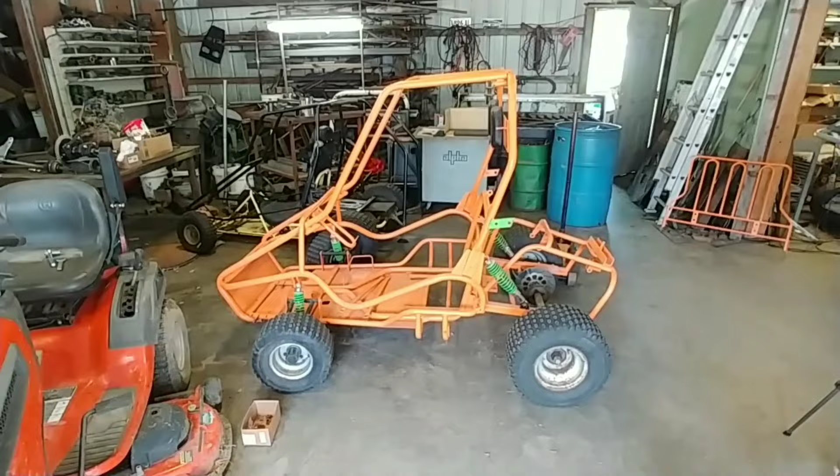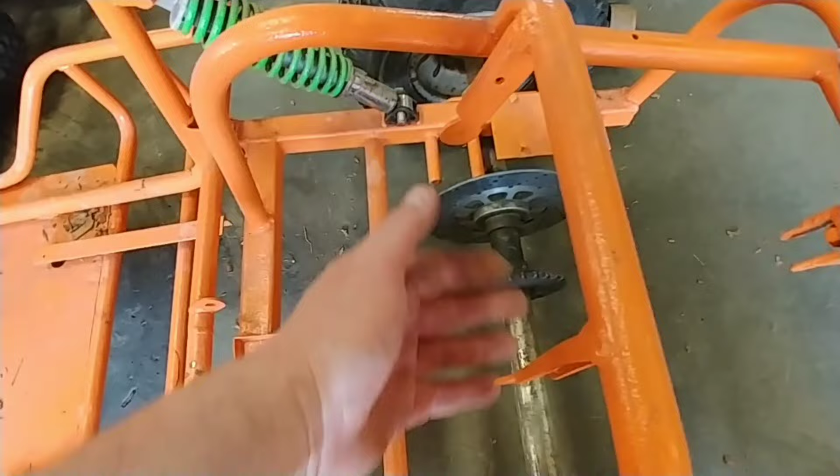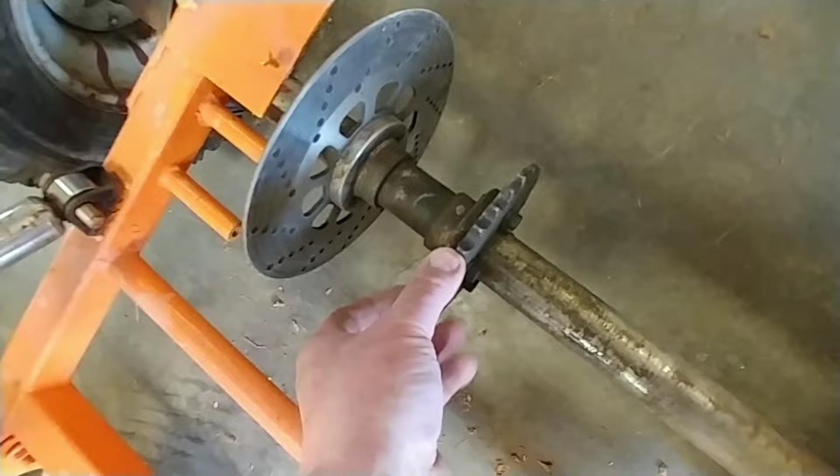So, the way this worked with the original engine, it had like a scooter motor that hung in here. No, not up there. Hung in here and there. I think that's a chain tensioner. And then the sprocket went down to that. That's how that worked. It was like a scooter motor. I think that'll be probably where the battery sat right there. And then the brake caliper looks like it hooked up over there.

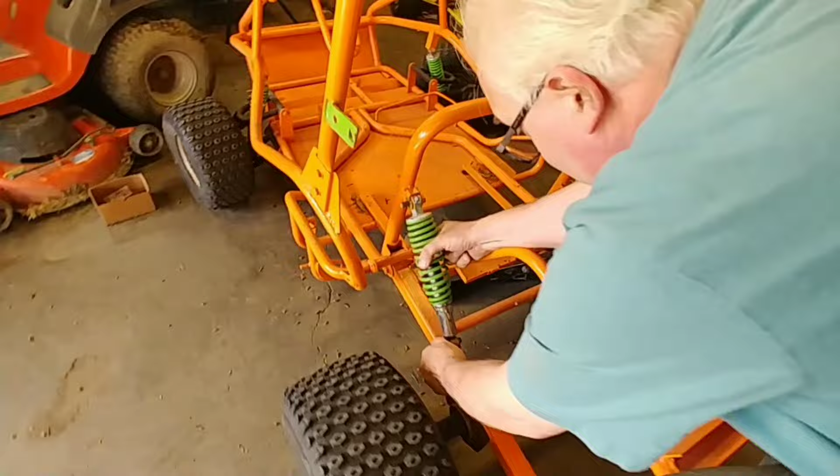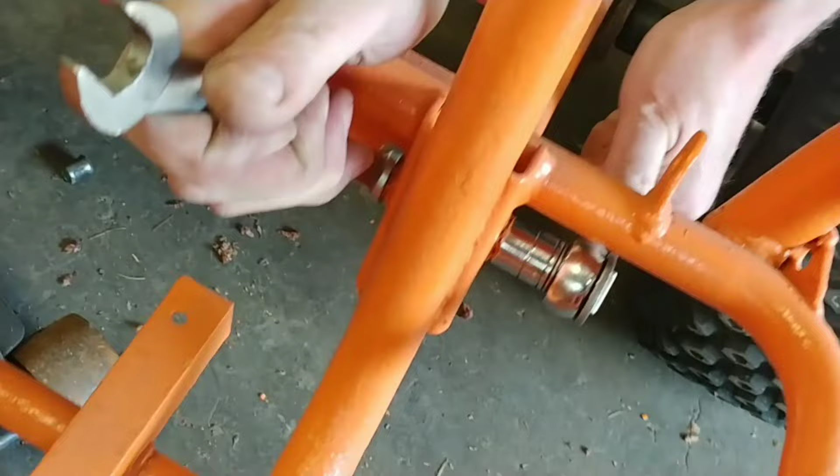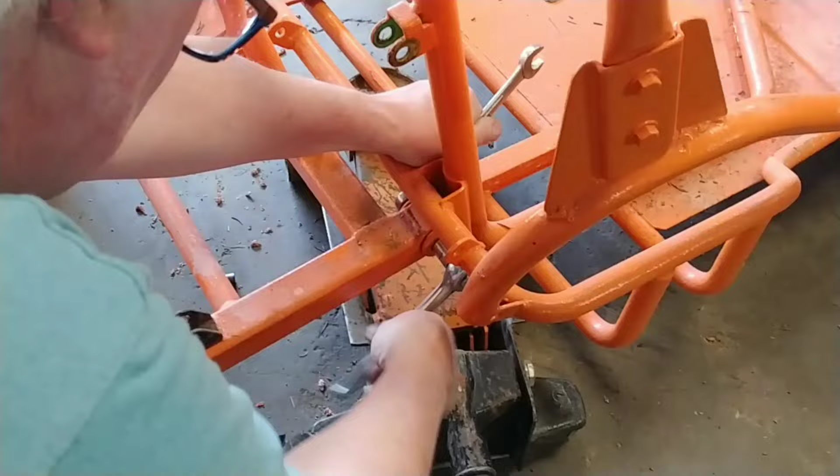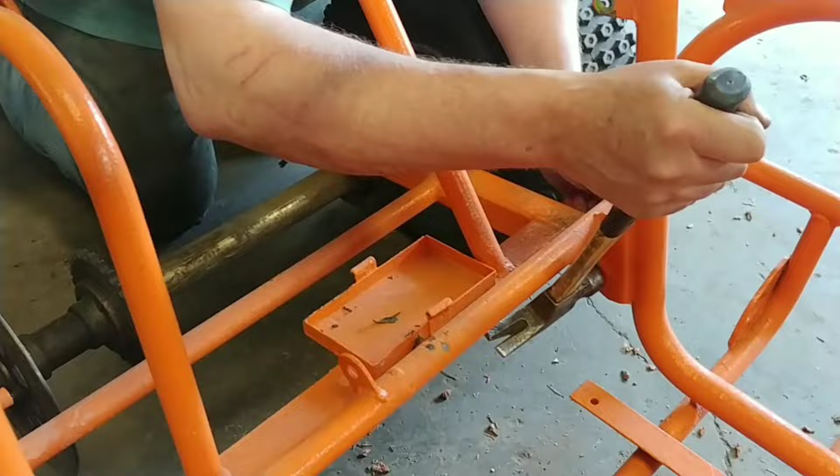So, okay, now we're gonna pop that off. How this works is there's a pivot down here, and so we're gonna pop those two bolts out and get this back carriage set up on. There we go. Unhooked.

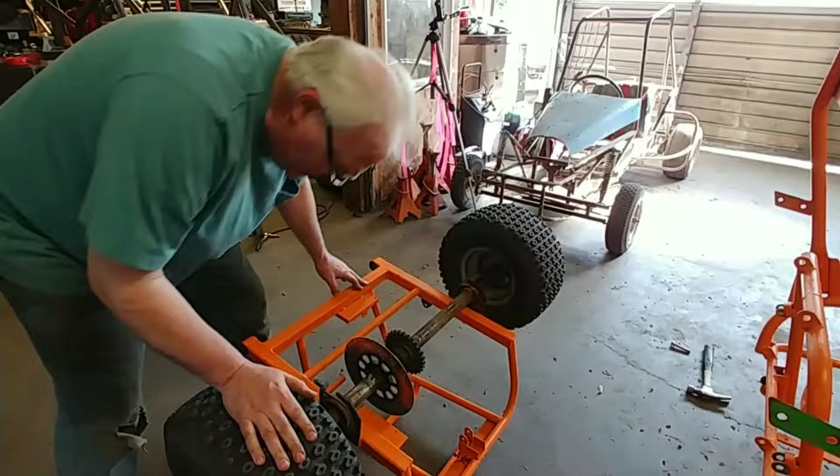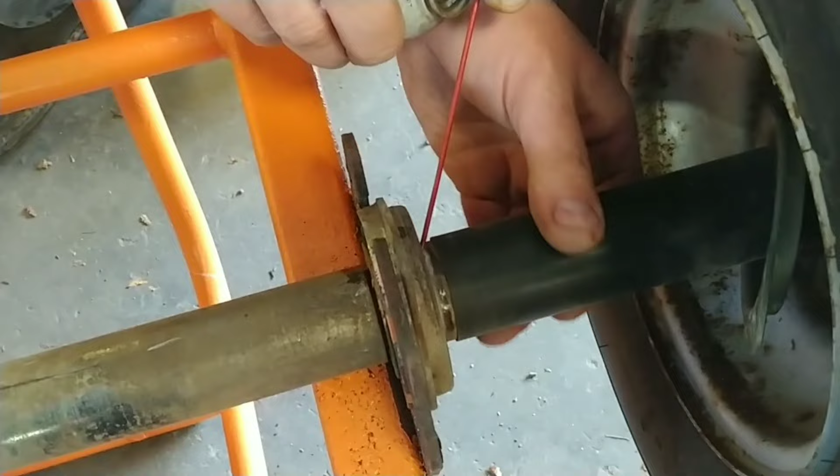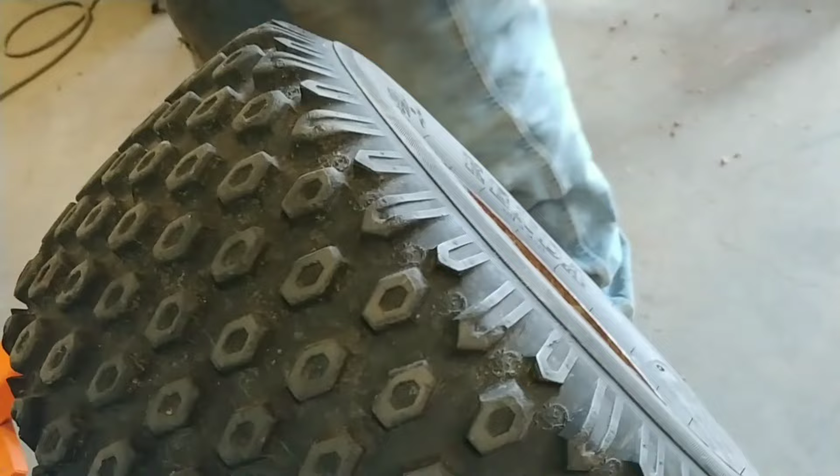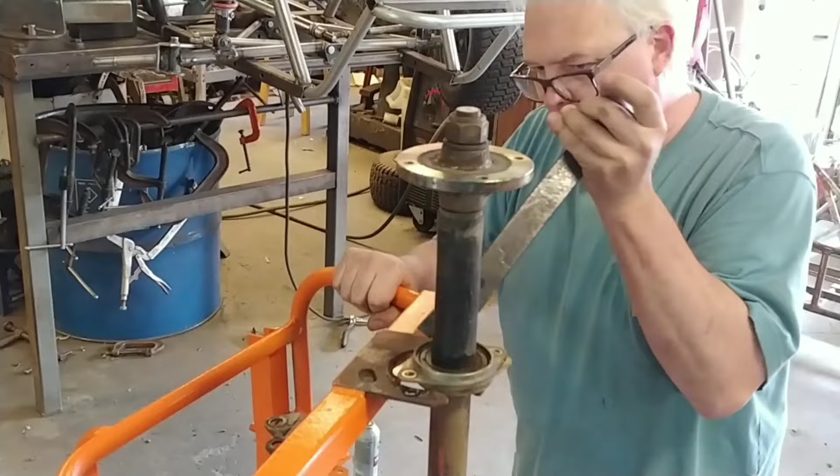Alright. See what holds this together. Looks like we're missing bolts. Almost. I think I'll pull this wheel off. Got two loose nuts. Bend this around it. Here we go. Okay, we got it.

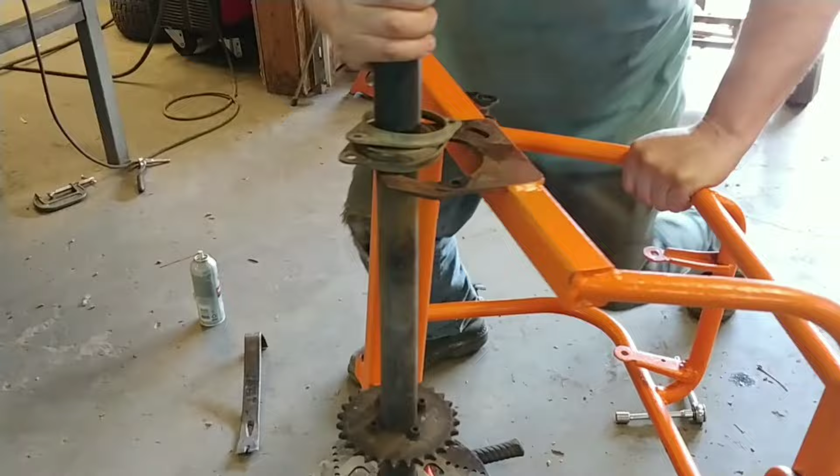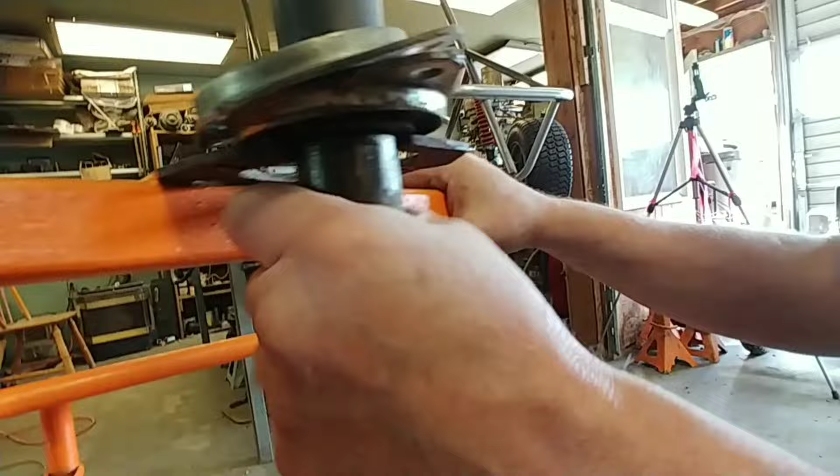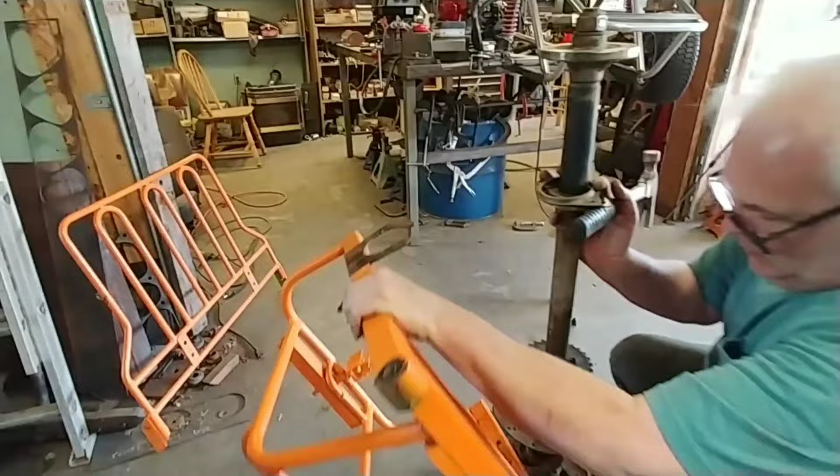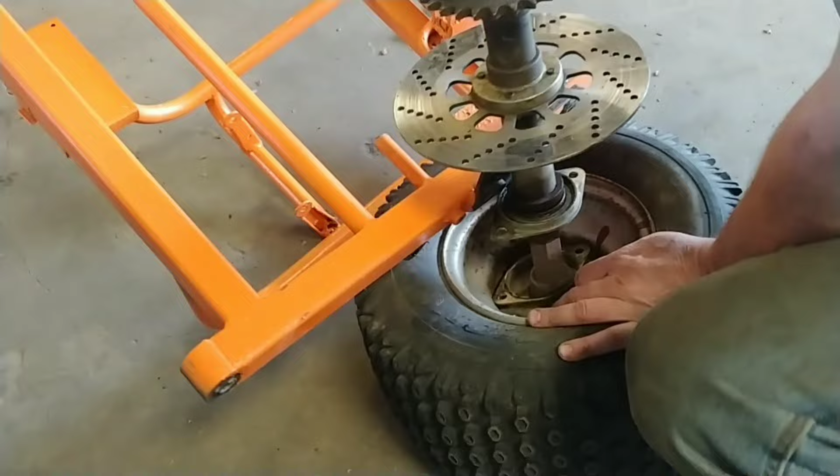Oh, nice. They gave us a slot there, but it's narrower than the spacer. See that? So it's never designed to come apart easy. Okay, I'll beat on it. Yeah, same thing here. See that? The spacer is bigger than the slot. The designers didn't design it to be torn apart. There we go. We got it.

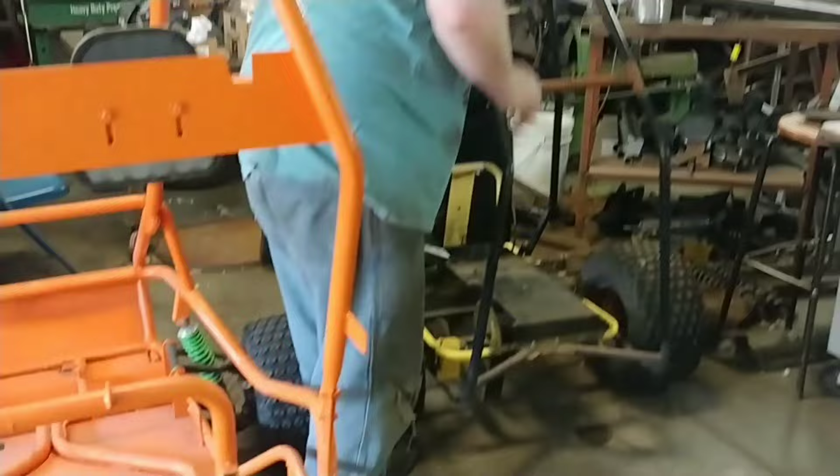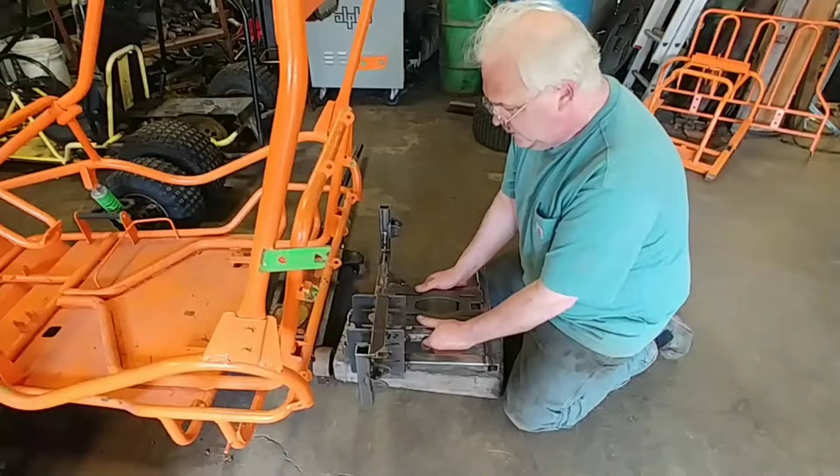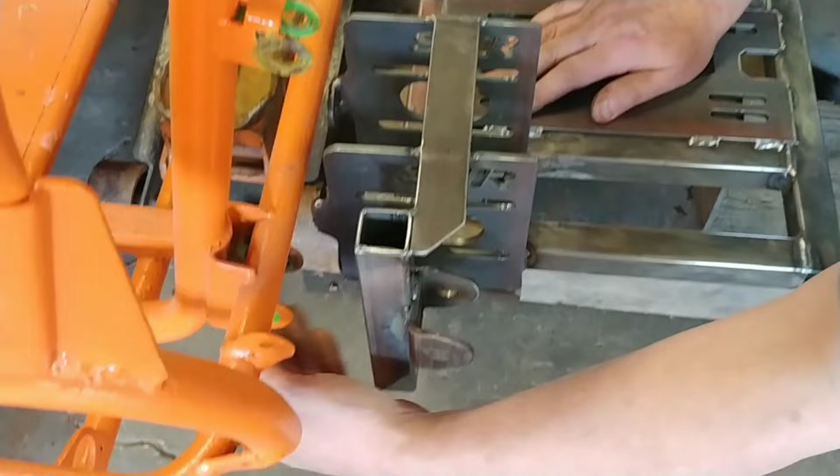Okay, now we're ready to start mocking up the framework and the axle. Look at what's next. So look at this engine carriage here. Okay, this bar here, I want that to be kind of even with that one. That bottom bar there. And then this will attach into here. That'll attach into there. Like that.

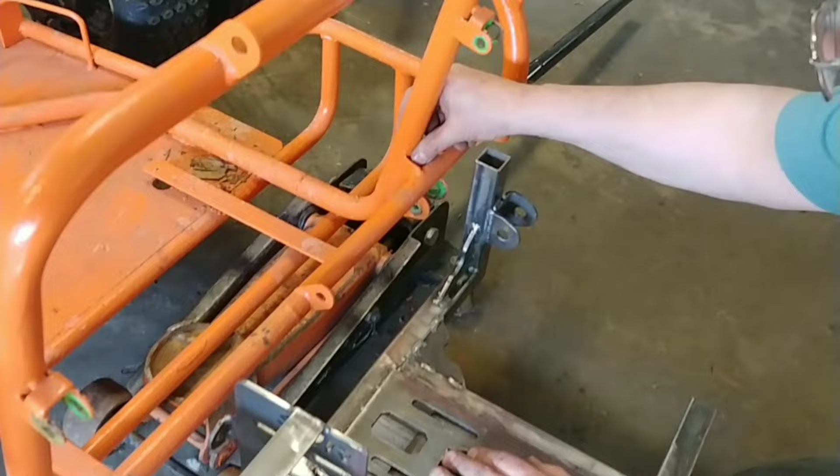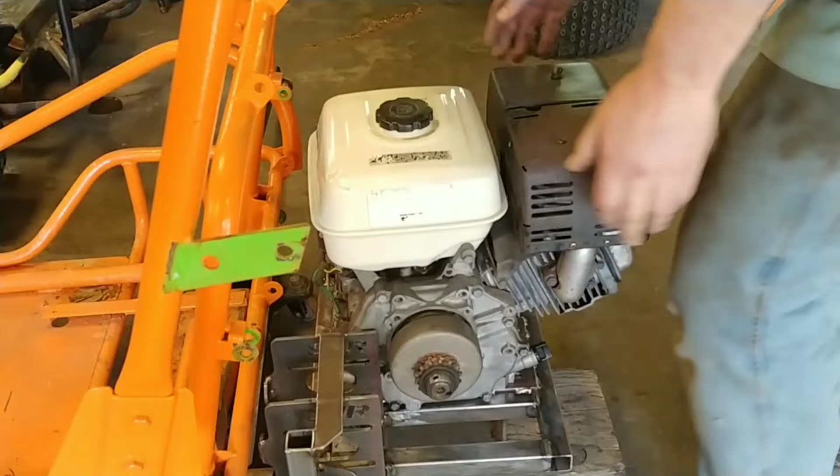Okay. We might take this bar out. Yeah, that bar might just come out of there. It'd be good to get this close. Could even get it closer right up against there. Be fine. Okay, let's put the axle there.

It's a hot one. And there's no breeze. It's hot and there's no breeze.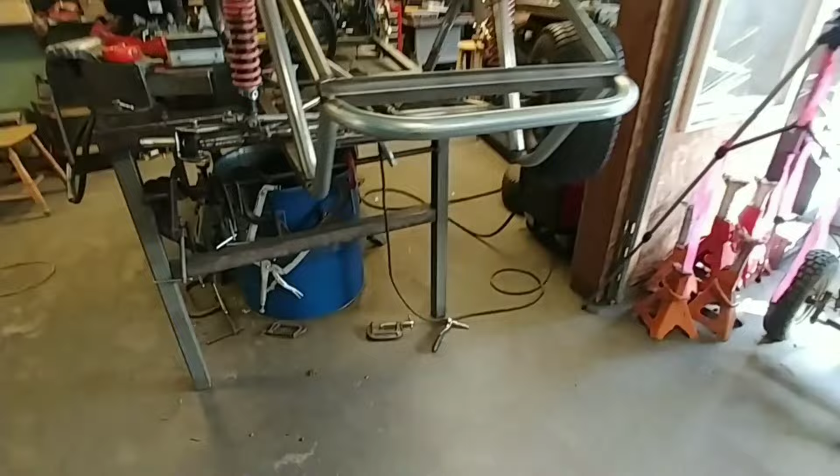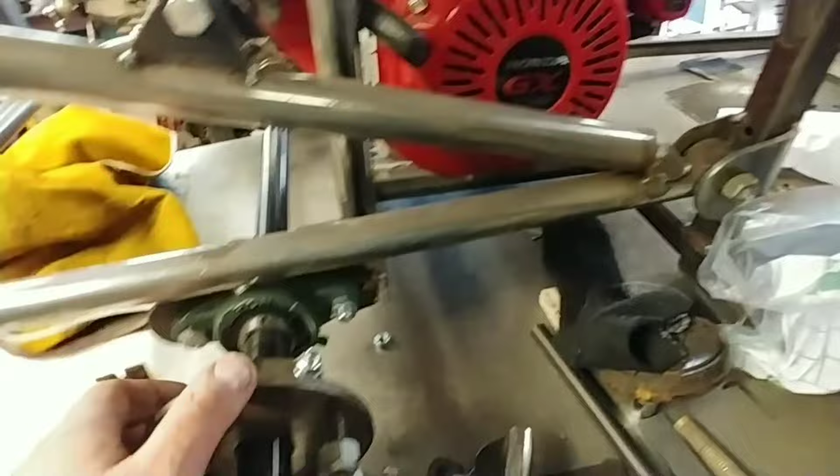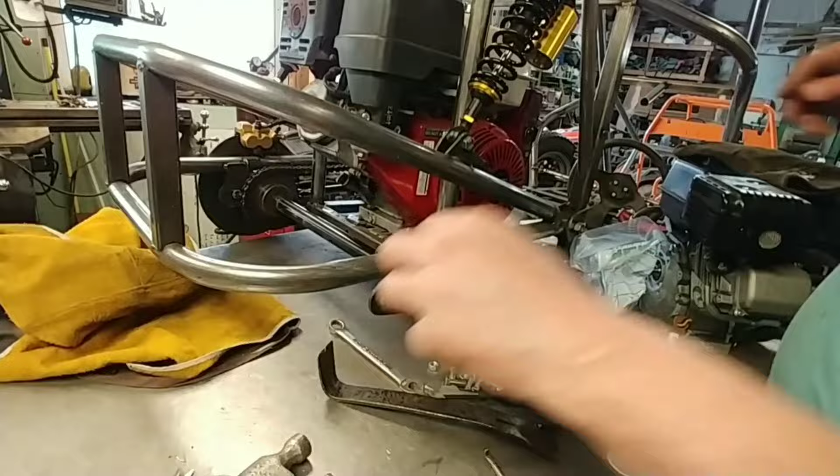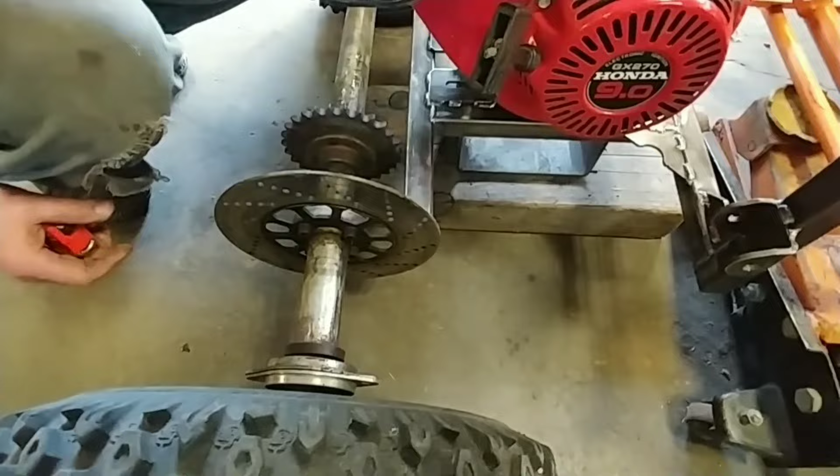So let's go look at what it looks like on the pattern. So what we got is this bar, pivot, axle, then I'll have a swing arm. So let's check this out. Okay, so we got about 15 inches from the pivot to the axle. So let's look what we got over here. So, yeah, we got about 15 right there. So yeah, I like that. I like how it's coming together.

I think what I'm going to do right now, I'm going to go ahead and cut that. Now that we see it, I'm going to cut this bar out, and then we'll slide her forward. This is closer. And this motor is a 9-horse. It's a 270 Honda. So this framework I made will fit the 240, 270, the 340, the 390, also the 200, the 212. So there's 3 different blocks that'll fit in this carriage. So I think what I'll do is get the saw and cut there and there.

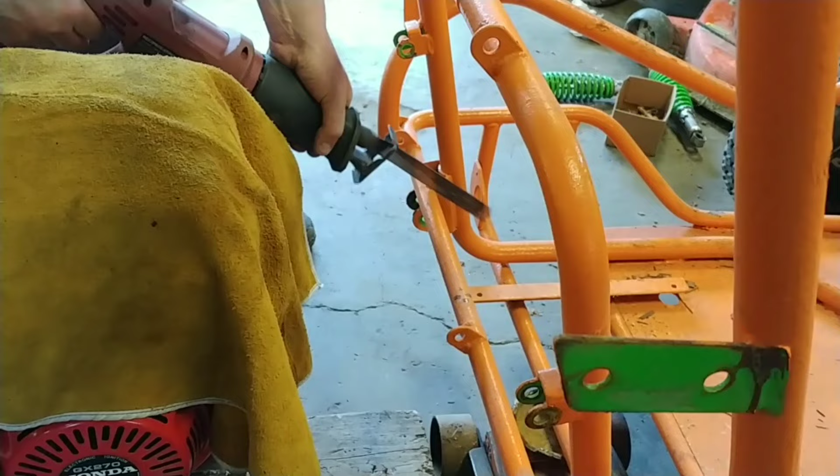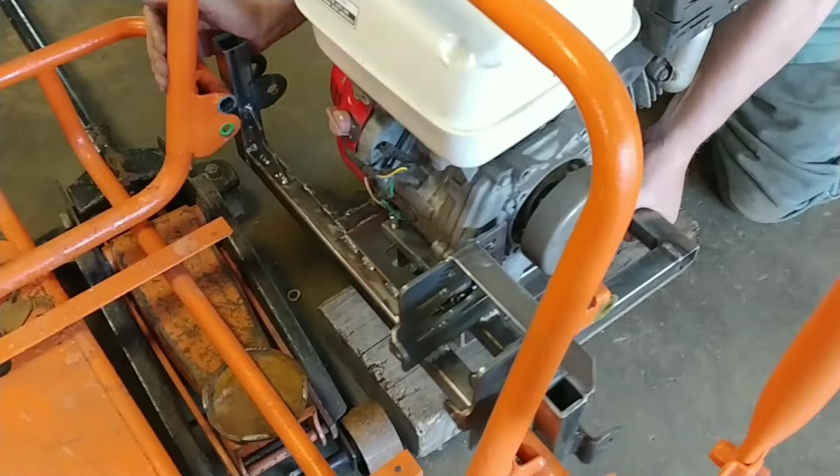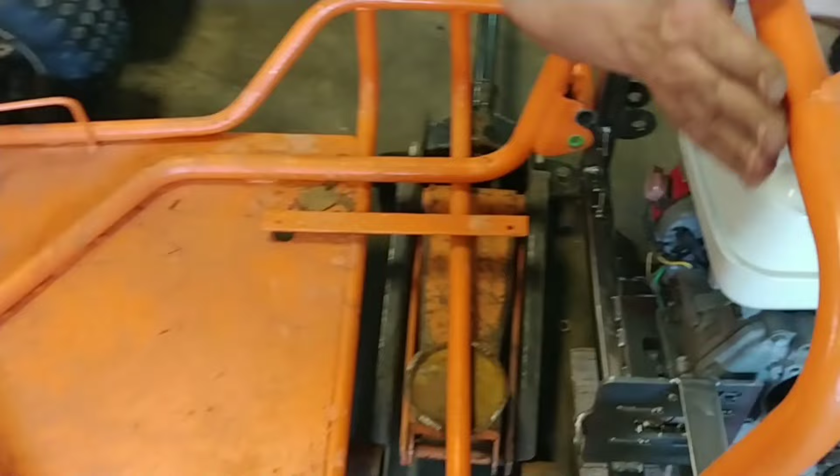Alright, let's get this closer. Alright, I like that. That might be where it lives. Might go down a ways. We got the back of the seat. Back of the seat's right in here. And also I'd like to sneak a battery in here somewhere. So then the adjusters for this. So I think that's good right there.

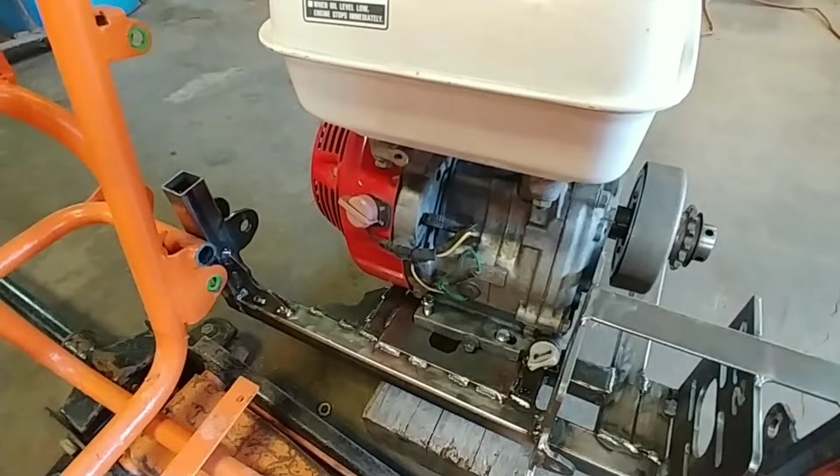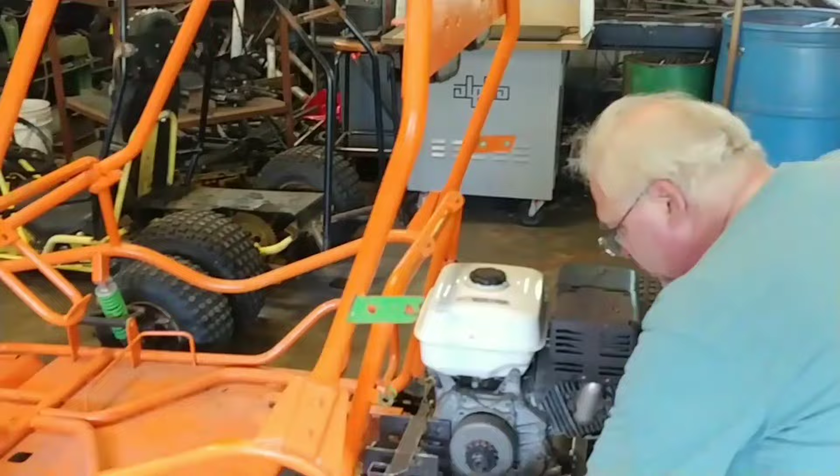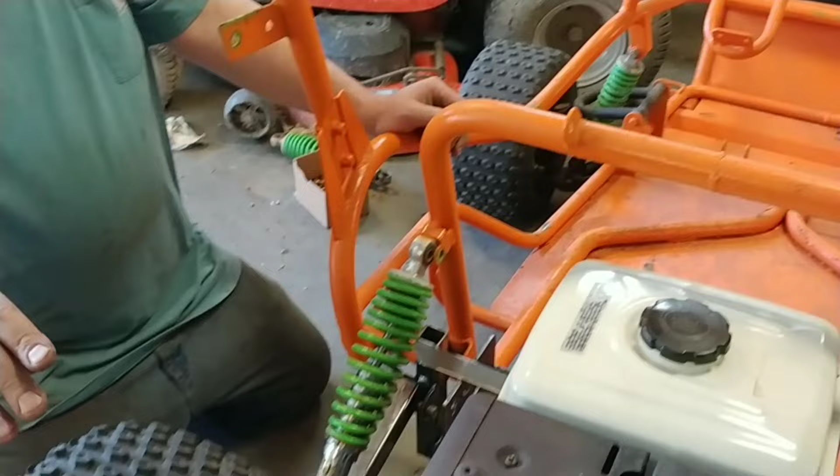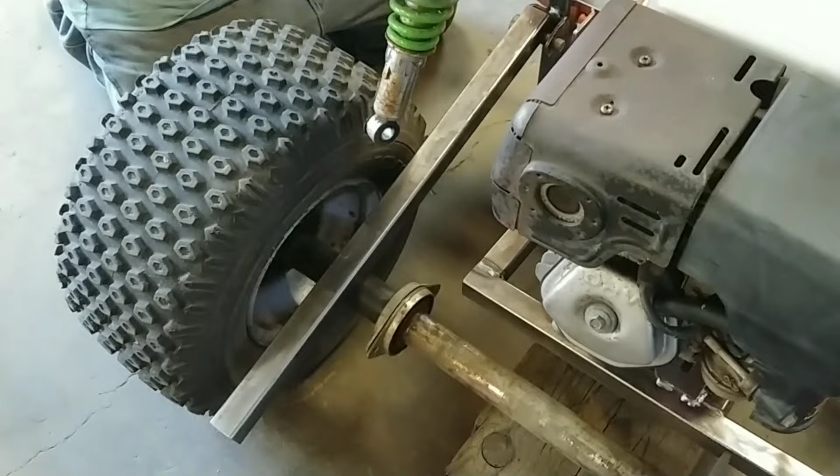So I think on this framework, come off back here with a loop, and then this is the bottom bar, and then there's another top bar that comes like that. We'll put the shock right in there. So this will have a framework like that, and then that'll go like that, just like that.

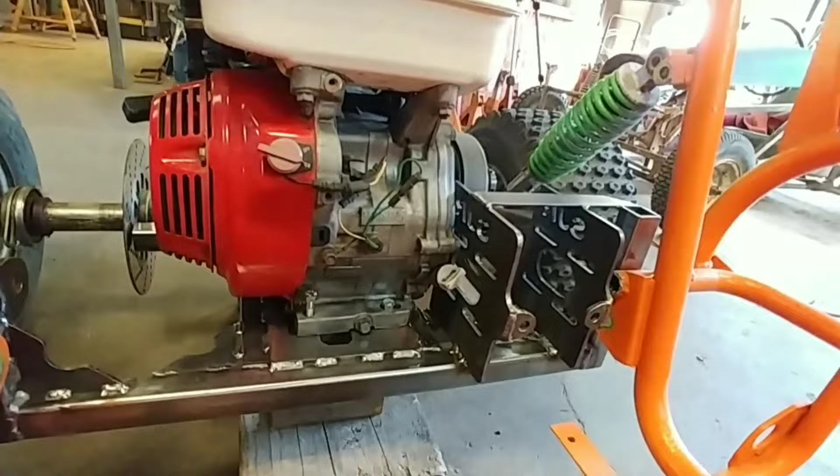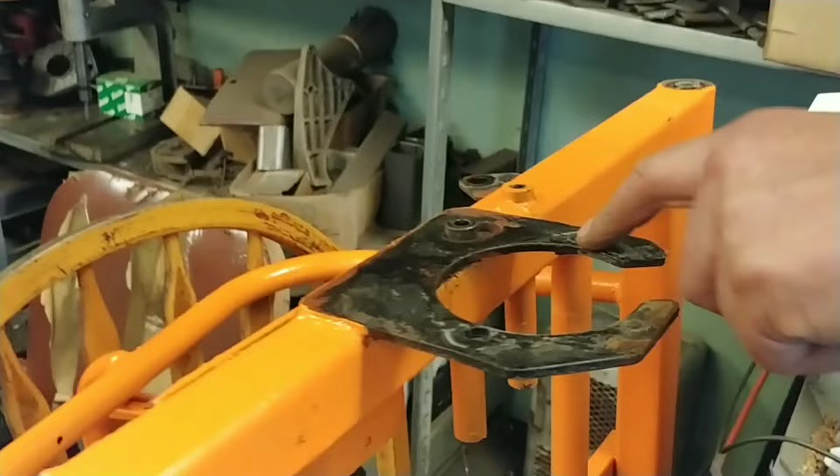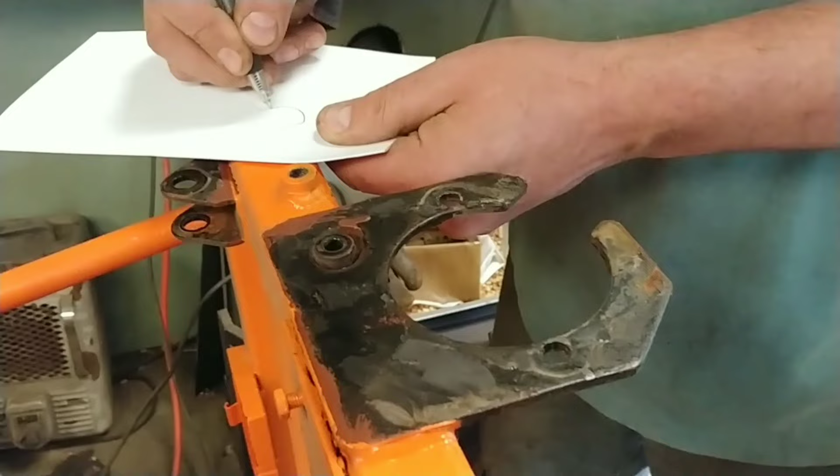Okay, so this is the pattern for the axle bearing. I'll show you how I'm going to do this. Come on in here. So I need to draw this pattern and make sure I got a bigger slot than that, because I'm going to put brackets like this on the swing arm I'm going to make. So first of all, we just draw what we have. There's that. And we have a slot. Okay, now we need to measure all that stuff.

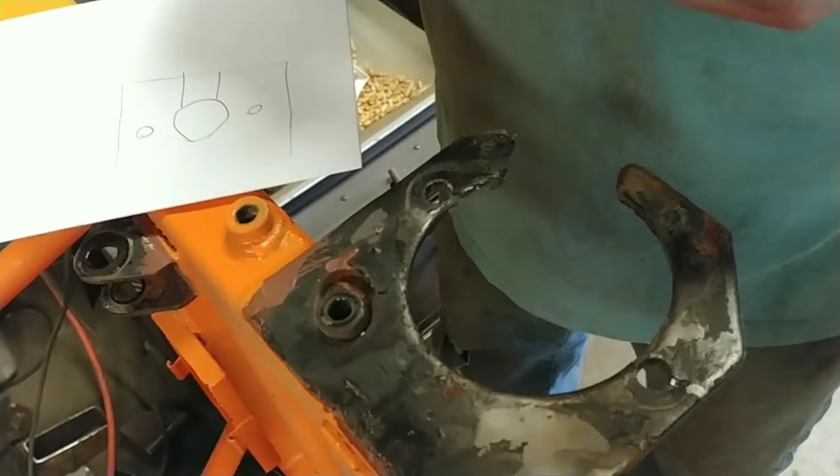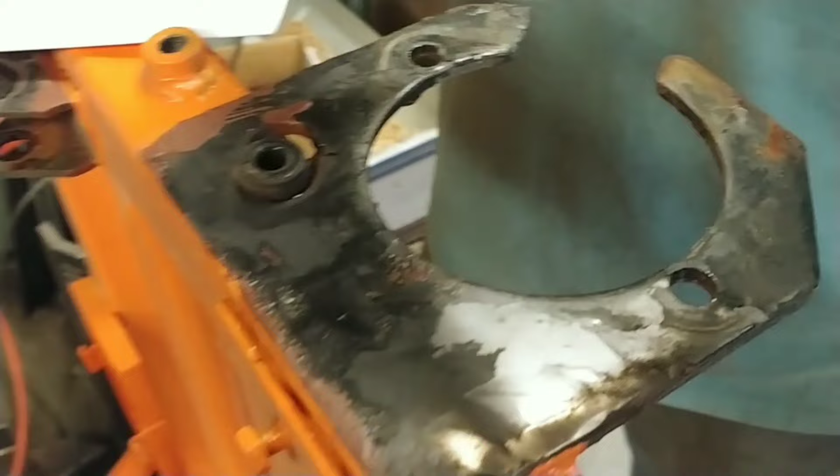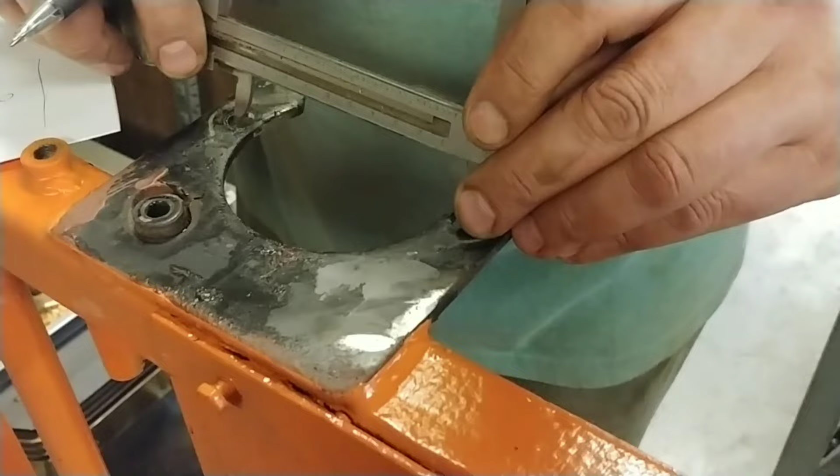So I've got my dial caliper. See what they got here on this hole. So that is 3.510. 3.510. That's that. And then got to do the bolt holes. The inside we are 3.710. 3.710. That's on the inside. And let's do the outside too. That is 4.5. 4.5 on the outside.

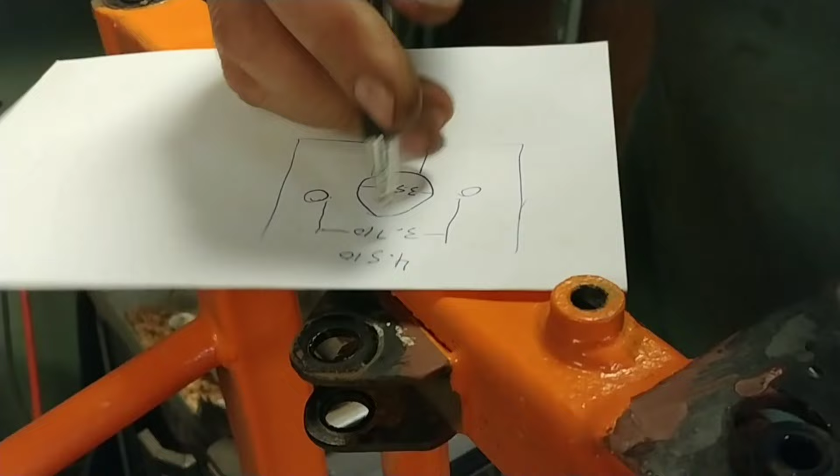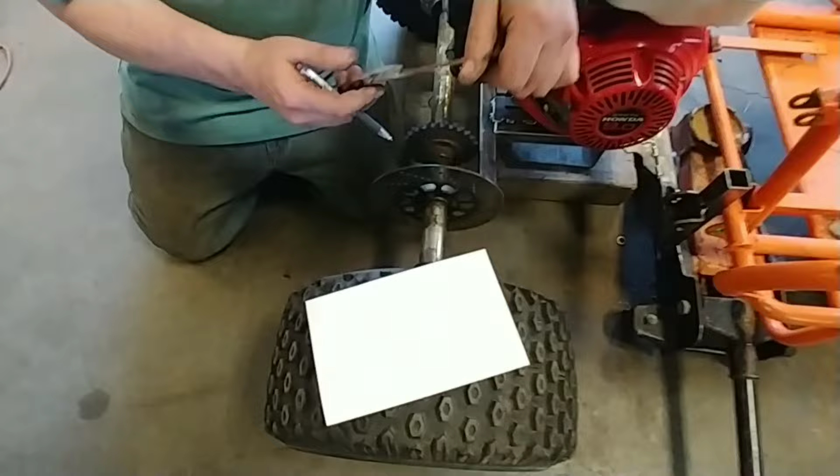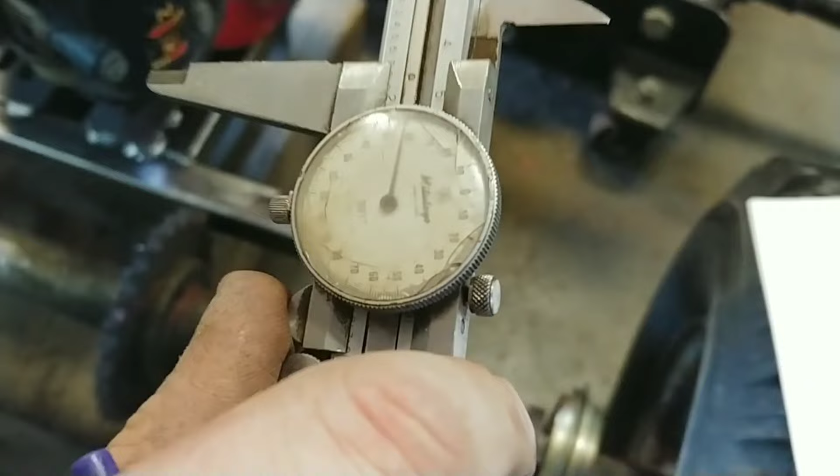Okay, so now let's go look at the axle and the bearing. So the bracket I'm going to make for that axle, I don't want to fight getting it on. Remember we fought to get that one off? Well, let's make it at least this big. So those spacers are 1.66. So let's make it 1.7. 1.7 plus. Okay, so that'll allow.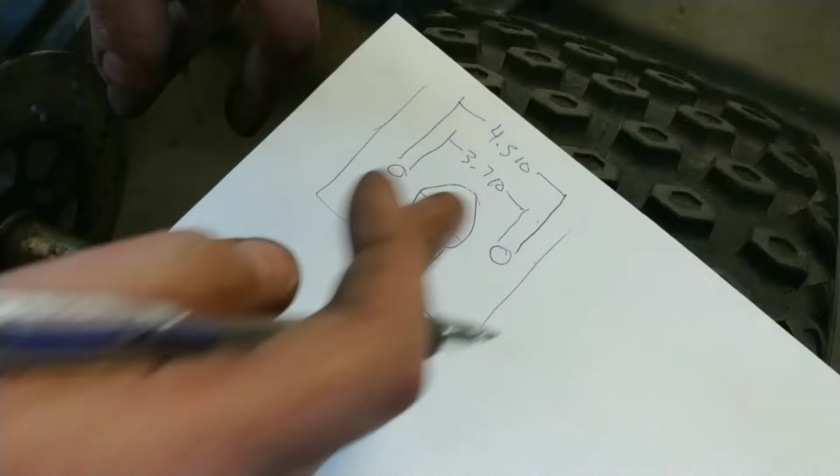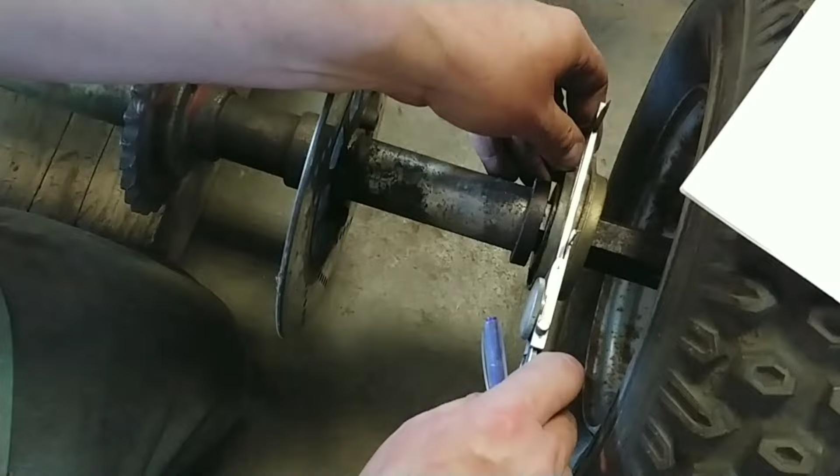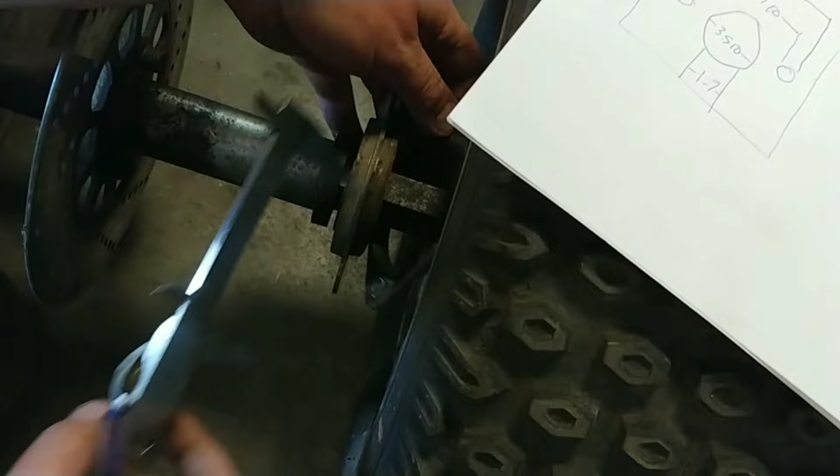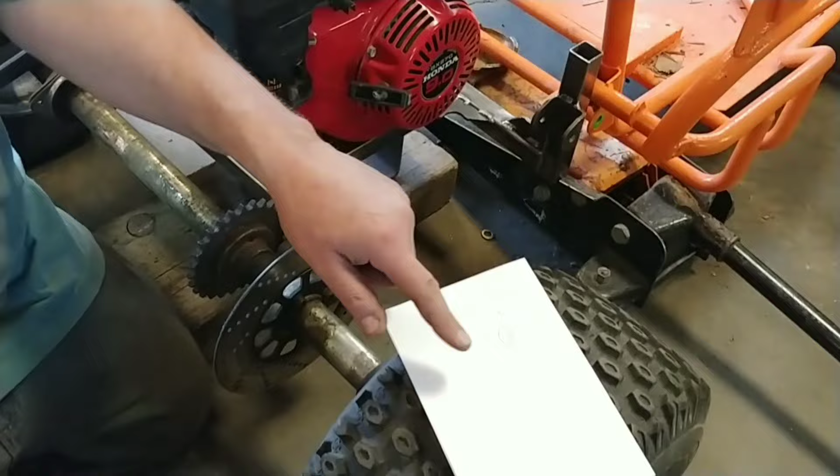Now while we're at it, I'm going to look at these. See these spacing too. So this should be a little smaller. Yeah, see that's 3.3. Let me look at it one more time. Yeah, 3.35. So 3.5 will work fine. Let's look at the holes while we're at it here too. See what they are. So they are 3.71. So yeah, same. So we're good on that. So with that information, I'll draw up a CAD drawing, and then over there, I will cut the parts out. That'll be next.

All right, I think I'm going to end up here on this video. So in this video, we showed you the buggy, showed you a little bit of the frame, did the first initial mock-up. I think the next step on this is to make the swing arm and then position this where it's going to live and attach it to that.